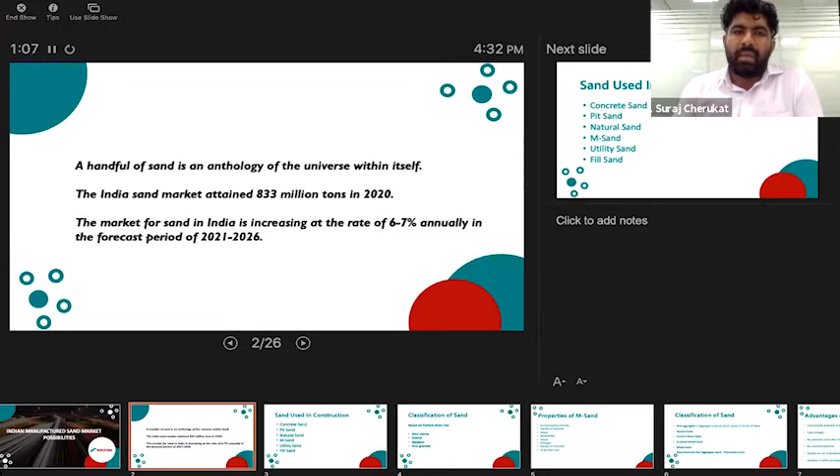If we look into the particular figures, you can't correctly quantify, but there is an approximate idea about river sand as well as manufactured sand. River sand was playing a bigger role in the Indian market, but slowly and steadily in various parts of the country, river sand is being replaced by manufactured sand. So I wish to give a clear idea about the primary differences between river sand and manufactured sand, and how and why manufactured sand is beneficial for the country as well as for everyone.

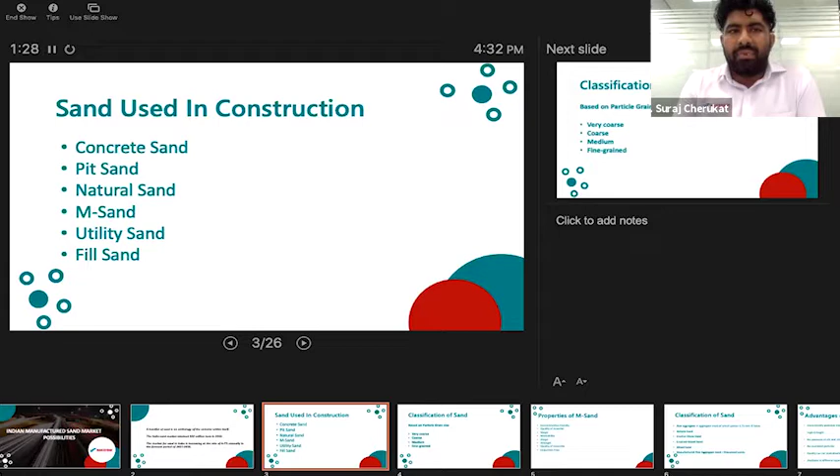When we look into construction activities, there can be various types of sand used: concrete sand, pit sand, natural sand, M-sand, utility sand, fill sand. These are not all used widely; a few are used to a certain extent and the others to a normal extent. Basically, sand means something below 4.75 mm. Sand is the fine aggregate whose size is less than 4.75 mm, from 0 to 4.75 mm. So we have very coarse, coarse, medium, and fine-grained sand. These are the typical types being used in the market.

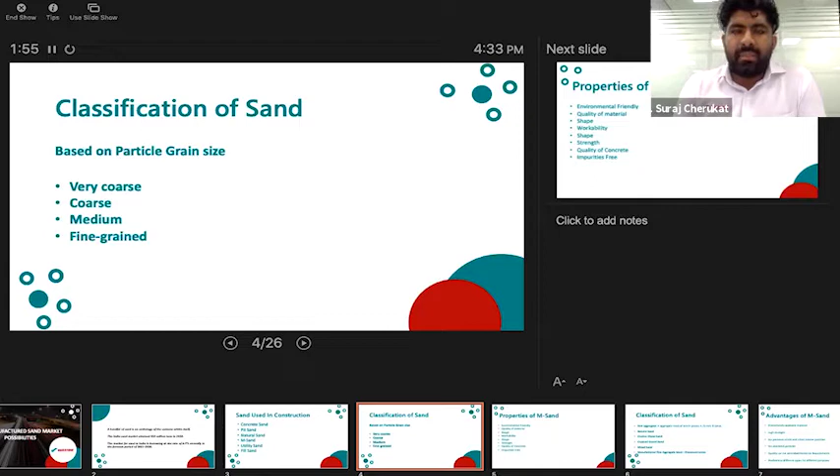Now when we specifically come into the properties of manufactured sand, popularly known as M-sand, I guess some firms have already patented the name M-sand, specifically in Kerala, so it cannot be used that widely. The first and foremost thing we focus on is environmental friendliness. As we all know, any development without considering future generations' right to grow cannot be considered sustainable development.

Various parts of the country had a surplus of water and all these facilities, and the Indian economy was an agrarian economy. Everybody was basically depending on agriculture. But from that situation, we have moved to points where even in normal times, water was not available even to drink. In certain cases, the rains have become uneven. Some places have cloudburst kinds of rain which lead to large amounts of soil erosion and further floods.

At the same time, in the normal season, we don't have water. So these are basically the results of depletion of rivers to a bigger extent, due to which there is depletion in the groundwater level, which has further affected the normal water tables a lot. So the importance of M-sand primarily comes in that area. We can save our rivers, we can save the natural water deposits.

But having said that, there are certain situations, like if you consider the Northeast, specifically the Brahmaputra river belt, and particular areas where the river sand has to be taken. Otherwise, if the river sand is not taken, it will lead to floods. So in certain parts of the country, we have to go for manufactured sand, which will save our water and nature. At the other end, river sand has to be considered. And so one important point of M-sand is its environmentally friendly nature.

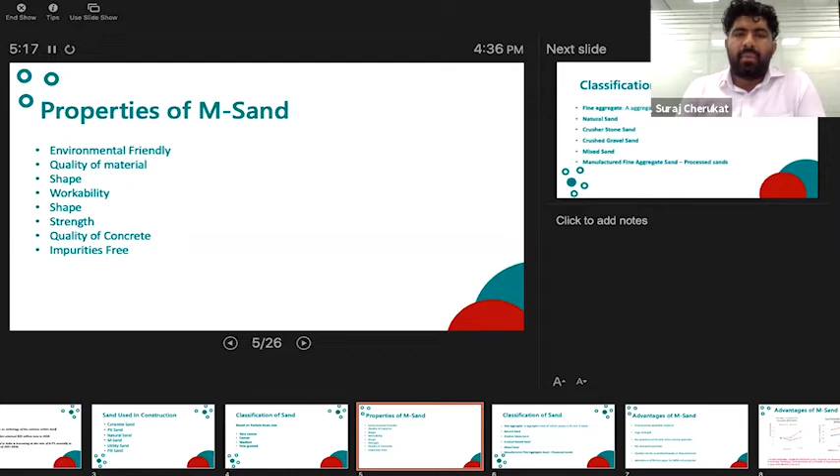Now we come again to strength. The flexural strength of the concrete is improved if you are using manufactured sand, because of more water absorption and more strength. The quality of the concrete, the strength of the concrete, the life of the concrete, all these things are improved if you are using M-sand.

Now, when we come to the classification of M-sand or manufactured sand, we call it fine aggregate. M-sand is normally called fine aggregate because the size is below 4.75 mm. I guess everybody would have gone through Abhinav's presentation where the coarse aggregates were very clearly mentioned. So, in 4.75 mm fine aggregate, natural sand is there for one. If we keep it apart, then we have crushed stone sand, meaning normal stones are crushed and converted into sand. Then we have crushed gravel sands where the gravels are converted.

Third one is the mixed sand, which is used in various areas where normal natural sand is mixed in certain proportions with manufactured sand. And the last is manufactured fine aggregate sand. This is one of the latest technologies coming up.

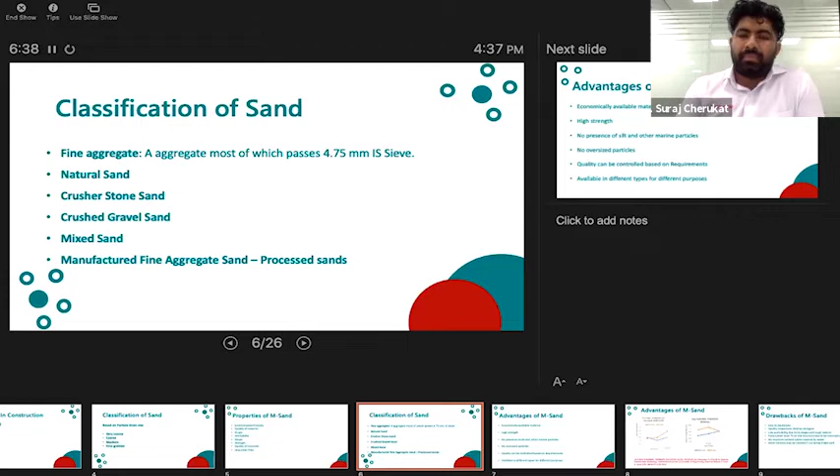You would have heard of a lot of flat demolishing and road reconstructions, and in those situations, the already used materials are recycled, and these recycled materials are again converted into sand, a naturally preferable material, so that it saves nature as well as product cost, and the product is reused. So that is the last stage.

Across India, till now, people are not that educated, or my perspective is that people's information about manufactured sand is not that adequate for making them think that, okay, if I have an option to go for a river sand as well as a manufactured sand, it is manufactured sand that I should be going for so that I can save money and get a better quality of product. Still, the notion is that I should go for river sand.

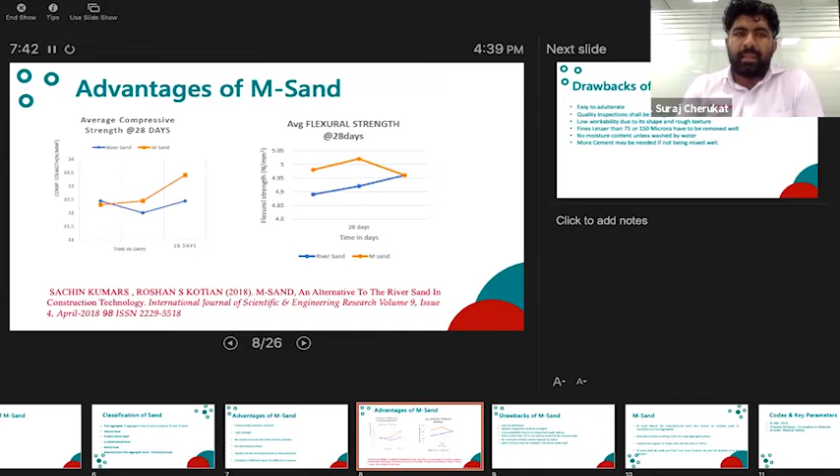So in this perspective, whenever concrete is made using manufactured sand, obviously the strength and other qualities of the concrete are better when compared to river sand. There are some drawbacks for M-sand or manufactured sand. The particular point is the quality with which it is being made. It can be easily adulterated because in a retail market, there are no stringent measures to check the quality.

If it is a corporate project or a National Highway Authority of India project or any other bigger project, in that area, yes, the material has to be tested and quality inspections are done. So there we can assure the quality of the material. But in a retail market, it is not done. And when there are fines lesser than 75 micron, which is not as per IS 383, then also the quality of the concrete which we expect to get is not good enough.

And if we talk about manufactured sand, there are two options to make manufactured sand. One is through wet classification and the second is through dry classification. So in the dust which is being used in dry classification, if any moisture content comes, it will adulterate the quality of the sand.

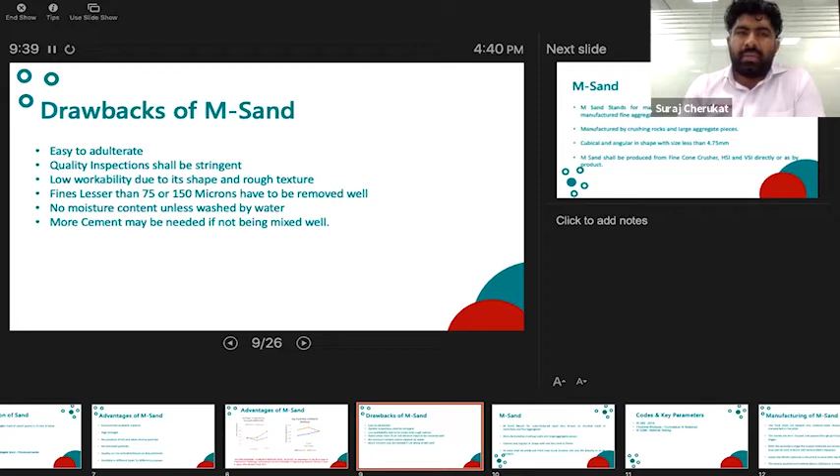So I just want to focus on how this manufactured sand is created from various possible options. We normally go for a 3-stage crushing circuit. Obviously, dust or manufactured sand comes as a byproduct if you are making aggregates to a certain extent. Or we can go for a dedicated circuit which manufactures sand alone. Predominantly 3 kinds of equipment are used to get manufactured sand directly: a fine cone crusher, a horizontal shaft impactor, and a vertical shaft impactor.

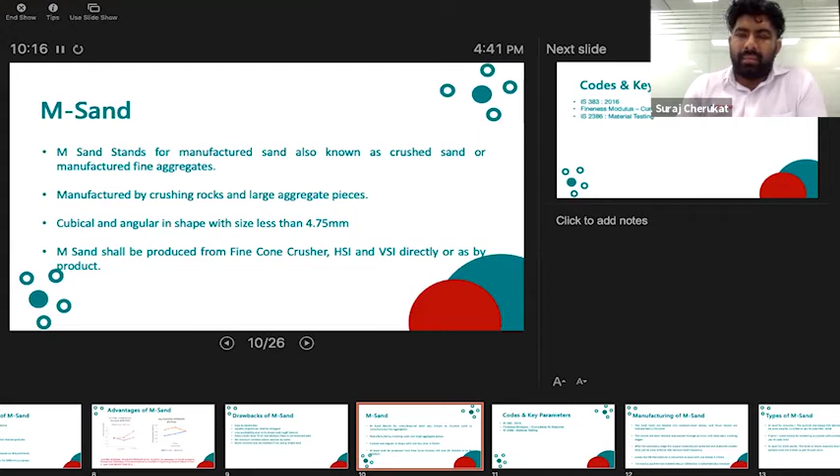When we go about the different standards and quality measures focused on testing and ensuring that the manufactured sand we use is good enough, one is IS 383, the latest version is 2016, and IS 2386 for material testing. These are the 2 codes and standards predominantly used for understanding the quality of the material we use. And one of the major determining factors for the quality of the sand is the fineness modulus.

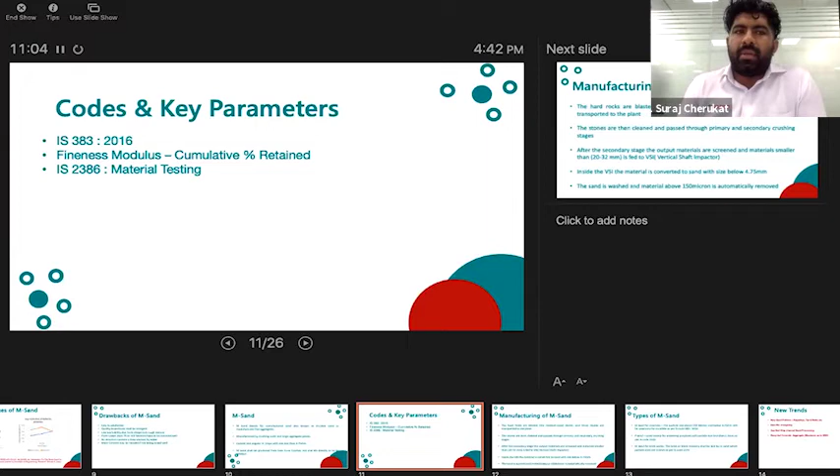The fineness modulus is basically calculated during the sieve analysis. A sieve analysis is carried out on the sample of the product which we have to test. Then the cumulative percentage retained is calculated and it gives a particular value.

In a normal manufactured sand process, this is a basic crushing circuit which we are going to focus on. The jaw crusher crushes the boulders into finer ones. Then the cone or secondary jaw crushes again, and the tertiary one, the VSI, crushes into any size below 4.75.

So the point is, as per IS 383, initially it was 150 micron to 4.75. Now we have improvised the 150 micron content by 10 more percentage, and 75 micron to 4.75 millimeter is being considered as the sand these days.

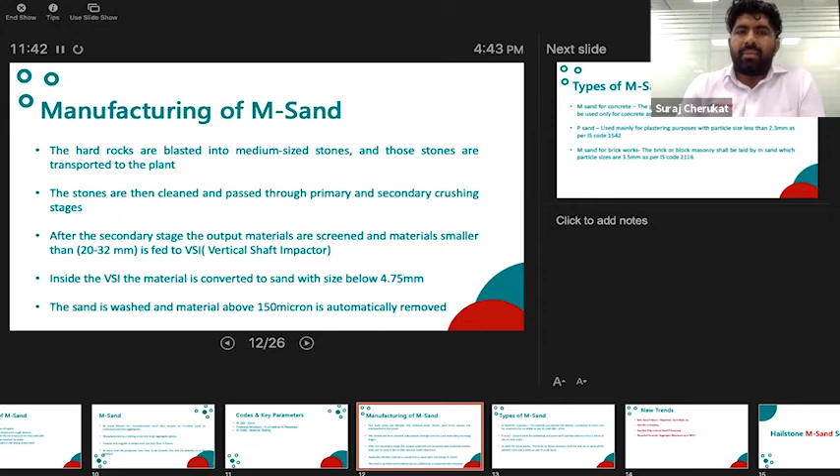So in manufactured sand, we have majorly 3 classifications. First one is concrete sand. Concrete sand predominantly across all India is 150 micron to 4.75 millimeter. Specifically in some areas, like certain parts of Tamil Nadu and certain parts of Kerala, it is 4.36 also. But on a standard, it is 4.75.

The next sand is the plastering sand. Plastering sand size also varies between 2.3 to 2.75 and to 2.9 in certain areas. But predominantly it is 75 micron to 2.3. And the last one is for brickworks, which is not commonly manufactured. It is like a byproduct and it is being sold.

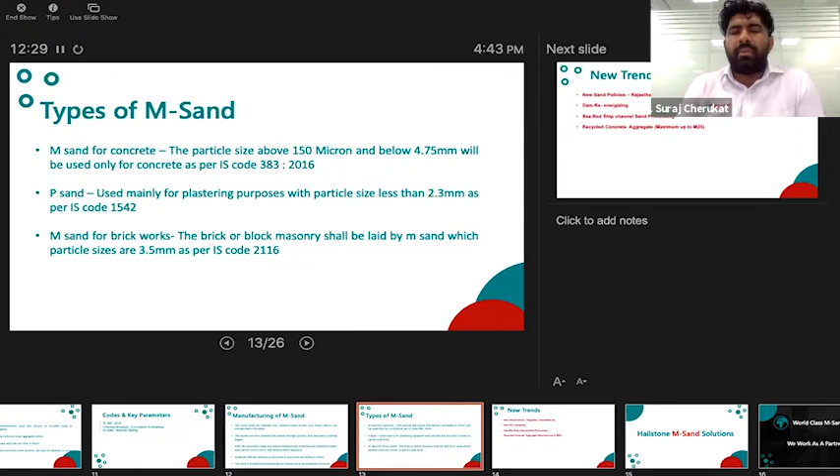But M sand and P sand, concrete sand and plastering sand, are the 2 major products being sold all across India. Now, if you ask about the new trends in the industry, since the importance of manufactured sand is very much evident and every individual is focusing on it, new sand policies have been released by the Rajasthan government, Tamil Nadu government, and lately by Karnataka and Andhra Pradesh.

These sand policies very clearly ensure that manufactured sand is used more in particular areas compared to river sand. Secondly, the quality of the manufactured sand is ensured, which ensures that every public project, bigger project or even consumer project is very well maintained in quality, their life is ensured, and nature is conserved.

Many would have heard about the dam re-energizing process. Dam re-energizing is a sort of manufactured sand, but it's a natural sand. Especially in Kerala, Madhya Pradesh and bigger areas, dam re-energizing has started. In India we have a lot of dams, and for the past 25 to 50 years, in the majority of dams the deposited silt has not been removed. All the silt is deposited there itself.

This is affecting the bearing capacity of dams. Dams will not be able to bear the amount of water they were bearing initially, and the water may have to be released into the rivers, causing floods to nearby riverbeds. Second, the power generation capacity of the government electricity boards is going down because they cannot store as much water as initially, which leads to power shortages at certain points.